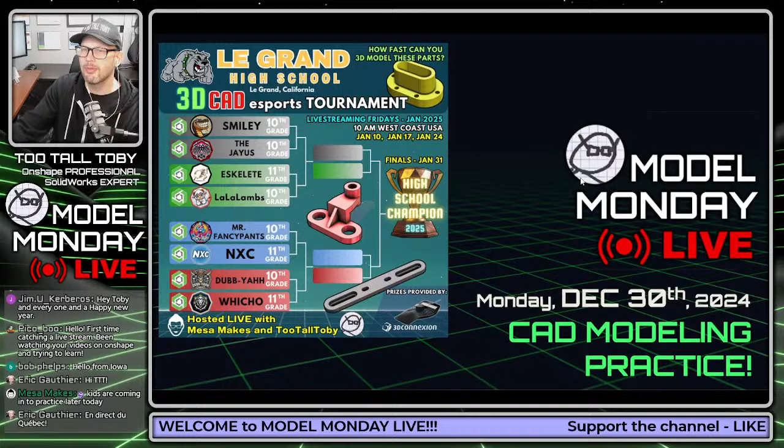Robbie says, I'm hoping to pass the Onshape Associate exam. Very nice. That would be awesome, Robbie. Good luck to you on that, and we'll have lots of tips and tricks to share with you today about Onshape to maybe help you through that challenge. But it's always good to set those goals, hold yourself accountable to those goals, and then ultimately achieve those goals.

You know, it's a lot of work to get through goals in the world of 3D CAD certification, and really just in life. But when we work really hard to achieve those goals, on the other side is where we're trying to get to. They say on the other side is greatness. So you sacrifice a little bit today, and then on the other side, you get to achieve greatness. And that's really what we should all be working towards. So huge shout out to Robbie on his journey, and good luck on that certification.

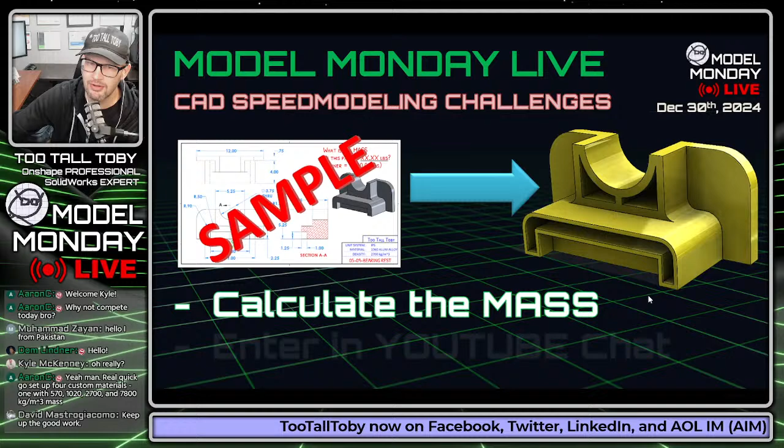Your first CAD speed modeling challenge is going to feature a 2D print. You're going to try and turn that into a 3D model as quickly as you can. You're going to try to calculate the mass, and you're going to enter your answer directly in the YouTube chat. The basic rules are you can use any 3D CAD package as long as you can input the density and output the mass. You are welcome to compete today. And make sure you use the specified precision, although I think all the models today are in full numbers. I don't think there's any... well, actually, you know what?

One of them is a decimal point answer. So make sure you use the specified precision. You can be more precise, but if you are less precise, then you might go out of spec.

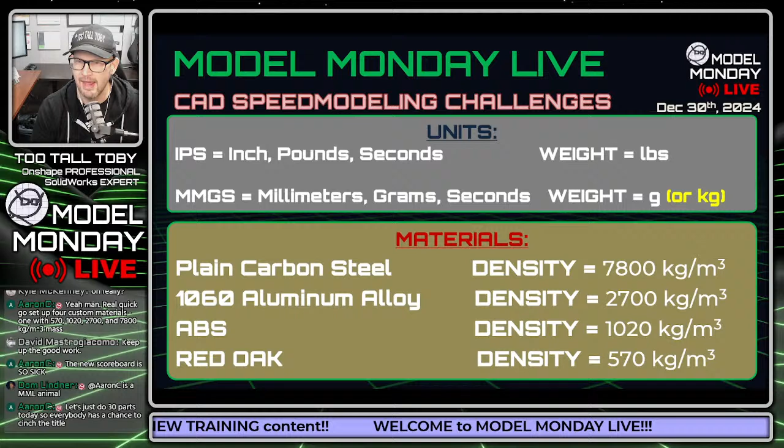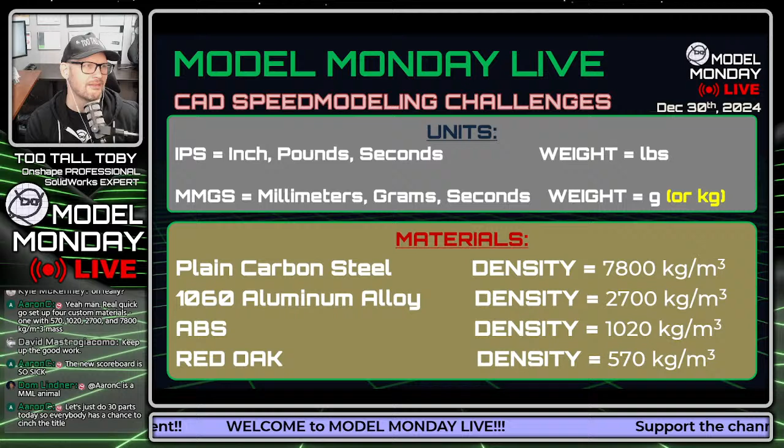Aaron C. says, let's just do 30 parts today so everyone has a chance to cinch the title. I like that. I like that. And Dom Lindner says, Aaron C. is a Model Monday Live animal. Yes. He is truly a super fan. Thank you so much, Aaron C. Much love to Aaron C.

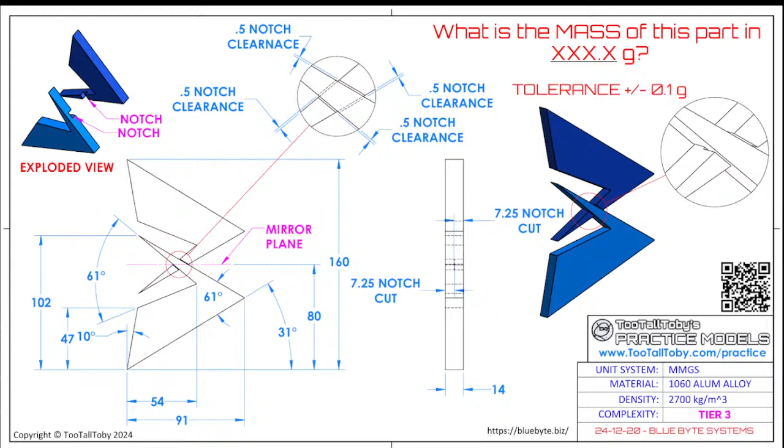I'm just going to look something up here real quick. Just probably going to play a little something in the background. I know, we're good. Sweet. Sweet, sweet, sweet. All right, guys. Hope that was enough time for you to grab the screen capture because we are moving on.

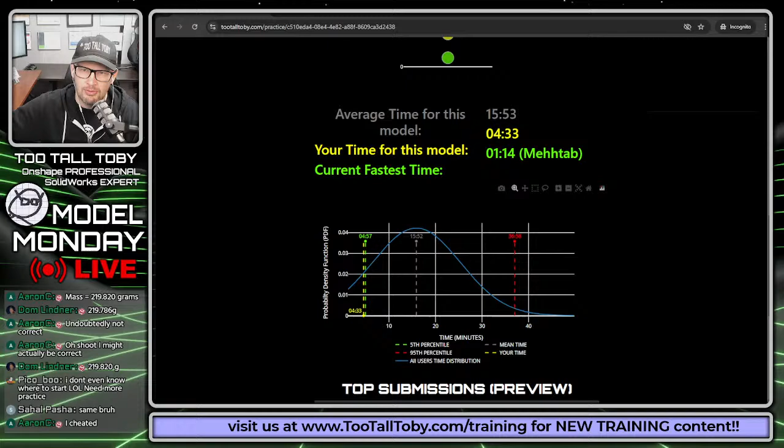They're a lot of fun. The cool thing about these challenges is that when you're done taking a 2D print and turning it into a 3D model, you get some pretty cool analytics. You get to find out how well you did on the challenge. So your time for the model was 4 minutes and 33 seconds. And then you can see what the fastest time was, 1 minute and 14 seconds. And you can also see what the average time was, so the average time from the field.

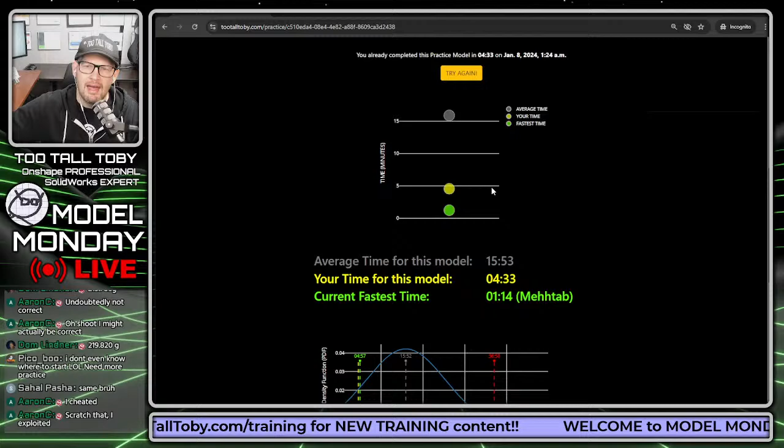You can see that there have been a total of 1,282 people who have completed this model. So that's kind of cool too. And then you can even click try again. If you're not happy with your time, if you want to go a little bit faster, you can click this try again button. You can try these challenges again.

But basically the way these challenges work is that you click here, you click reveal drawing, and boom, the drawing is up, and now your time is running, and you're challenged to figure out what the mass is. And once you figure it out, you can enter it into this field here. I'm going to enter in a mass of 999 grams and press enter, and it says incorrect. Your answer of 999 grams is not within the specified tolerance. The clock is still running.

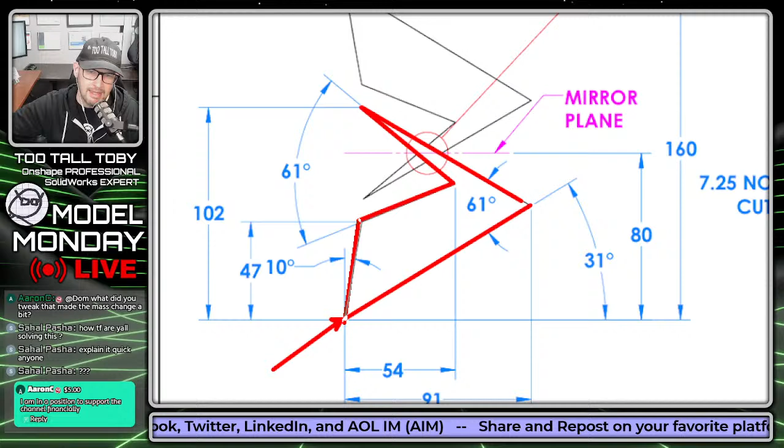So you probably would want to start a sketch on the front plane and then sketch this shape on the front plane. You have all the dimensions you need for this shape. And you can create that geometry on the front plane of your modeler using lines, and then you can go back in and you can use dimensions to lock in the locations of those lines, and that'll give you what we call a fully defined sketch. Then you can extrude that. I think the depth is 14. Yep, you could extrude that out to your depth of 14, and then you can use a mirror command and mirror that shape up top here, so you'll have the same shape at the top and at the bottom. And then after you got that, you can do some cut extrudes.

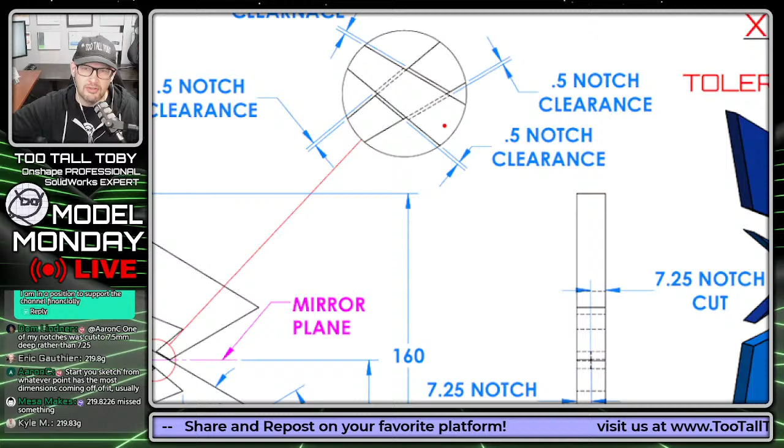You can cut extrude here with this 0.5mm clearance. So for example, you could start a sketch on this face, and then you could maybe create a shape like this that has parallel lines that are all 0.5mm parallel offset, this 0.5mm clearance. And then you could take that shape and you could cut that to a depth of 7.25. So that'll let you cut the notch in one of these. You see up here, it says notch.

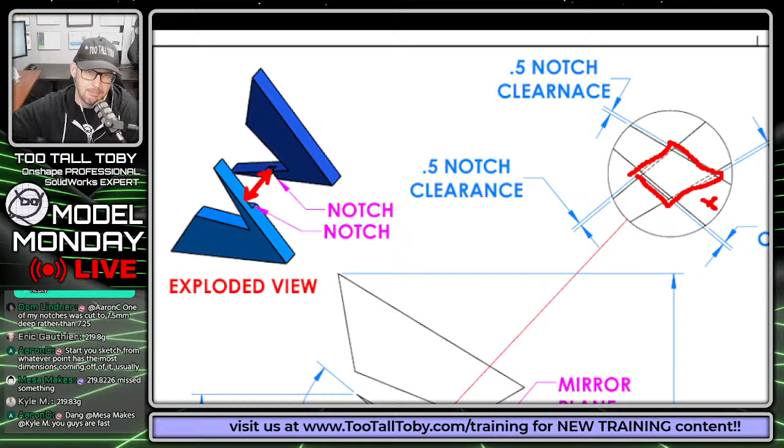And then you just repeat that process for the other one. And that should leave you with a gap here between these two. There's going to be a little tiny pocket here, a little tiny gap of 0.5 millimeters as well. Because it's 7.25. That's 14.5. And this is only 14 deep total.

So that'll give you 0.5 additional little gap there between them. And that should do it for that one. So I hope that's what you were asking for. I hope that explains it.

If it does, Sahal, let me know in the chat. Put a 1 in the chat. Let me know. And we have some other people in the chat also letting you know kind of what they think. Yep, no problem. No problem. Thank you for the question. Happy to help you through that one.

So we're going to talk more about this join option in just a minute. But beyond that, let's talk about what's going on with this high school tournament. So the high school tournament is going to take place on January 10th, January 17th, January 24th, and January 31st. There's only going to be 8 people in this tournament. Our world championship has 16 people in it. This tournament's going to have 8 people in it, and these are all high school students in 10th and 11th grade at Le Grand High School.

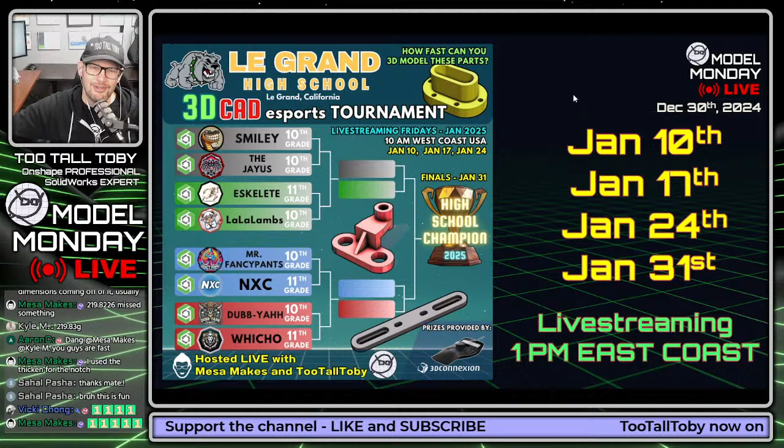So very excited to see these matchups. Very excited to see how these students do. I am super, super excited to see how these students do. And this is going to be a cool tournament. The tier level of the challenges is going to be a little bit lower to be appropriate for high school students. But I'm excited to see how they do. I'm excited to kind of experiment in this new format. And it's just a really exciting time here as we're moving into this format of working with high school teachers and working with high school students and doing some more tournaments like this. So hopefully this will be the first of many of these high school championships.

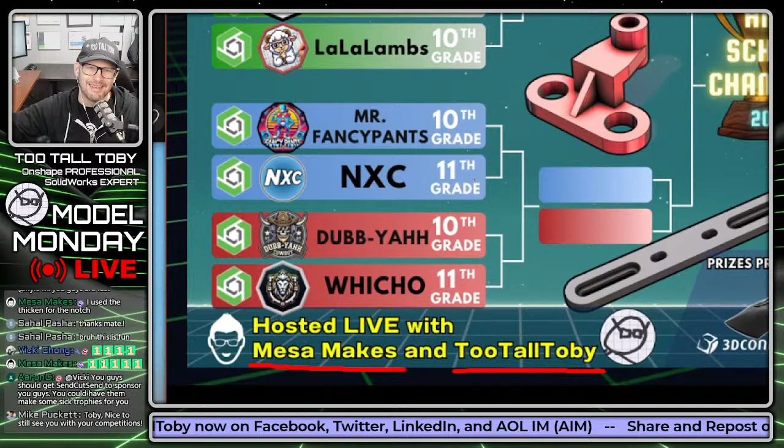And of course, huge shout out to Mesa Makes, who's in the chat, who's the instructor for these students. And I'm so excited to see how all these students do. Let's take a look at some of these names. We got Smiley, who's in 10th grade, going up against the Jayus, also in 10th grade. We got Eskelete in 11th grade, going up against La La Lambs in 10th grade. We got Mr. Fancy Pants in 10th grade, going up against NXC in 11th grade. And we got Dubb-Yahh going up against Whicho, 10th grade versus 11th grade. So this is going to be a really fun tournament to watch. I am super excited about this.

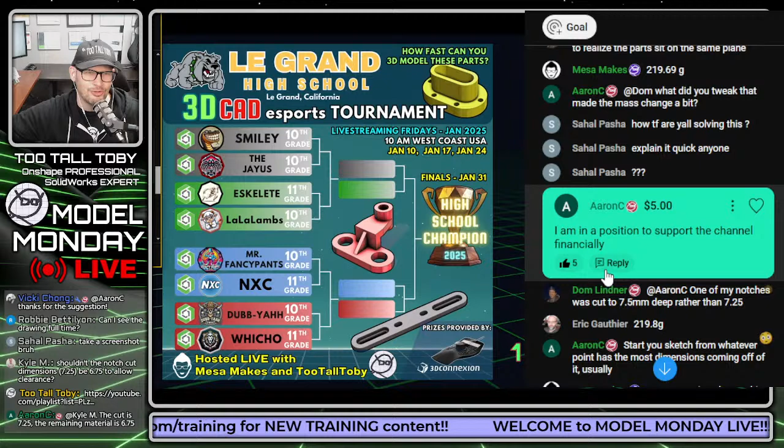And we see Mike Puckett in the chat, old friend of the channel, certification guru at SolidWorks. Mike says, Toby, nice to see you still with the competitions. Yes, indeed, Mike. They're only getting stronger, my friend. Great to see you in here.

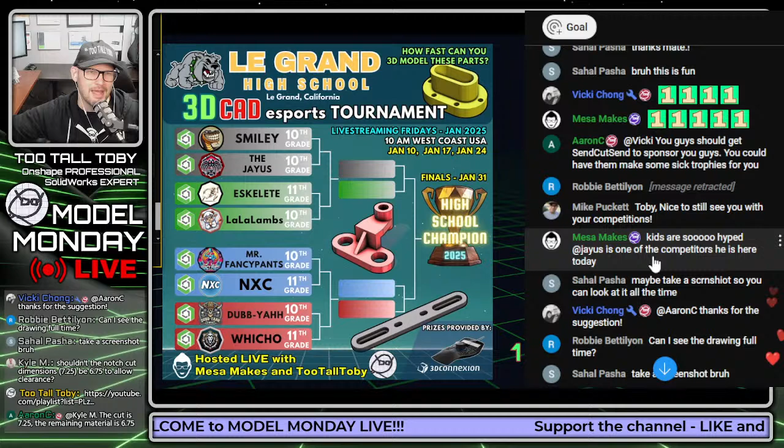All right. Question came in here from Kyle M. Shouldn't the notch cut dimensions 7.25 be 6.75 to allow clearance? That's a good thought. But if we only made those 6.75, we'd come up short, right? Because the cuts wouldn't go deep enough. If we only made them 6.75, then there would be 0.5 additional material here. And we want that to be 0.5 gap, not additional material. But great question. Definitely know where your head was on that one, Kyle. But yep, we want that to be 7.25, so we end up with a gap.

Can you draw the curved alignment post? Yes, definitely. I'll definitely draw that one up, Mehmet. That's on my list of things to do. So thank you for asking that. And we will definitely be seeing that coming out in the next couple of weeks on the channel, maybe even this week.

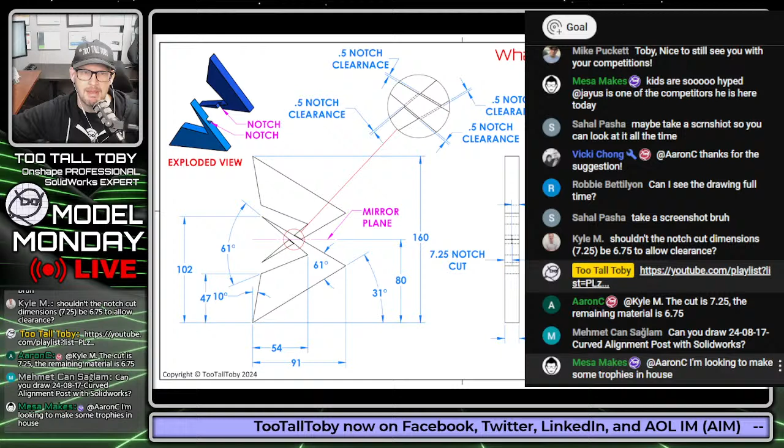Mesa Makes says, I'm going to be making some trophies in-house for this tournament. Yeah, that's what I like to see. I got to see one of those. That is awesome.

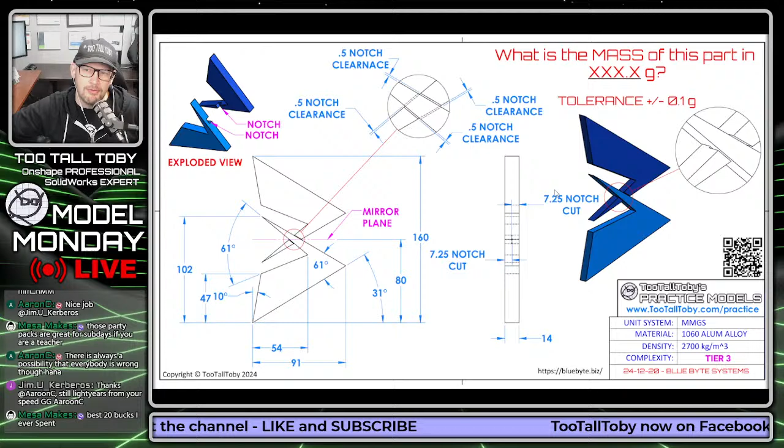And this first challenge here is called Blue BYTE Systems. And of course, this is part of our ongoing promotion. If you sign up at TooTallToby on YouTube and you use the join option to join the channel, there are 2 levels you can join at. And if you do the buy me a cup of coffee level, then we create a custom personalized practice model for you. So we want to say thank you so much to Blue BYTE Systems, who has joined that program.

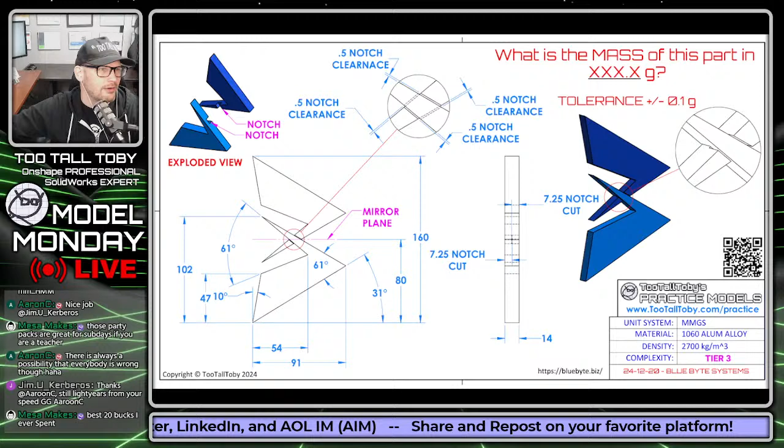So for this one, this is kind of a fun one. We're using the Blue BYTE Systems logo here, kind of turning it into a 3D model. Let's see what we got here for our answers in the chat. So Aaron C came in pretty darn fast with his answer, and his answer was 219.8. Dom Lindner, 219.8. Dom Lindner revising 219.8. We got Mesa Makes 219.7.

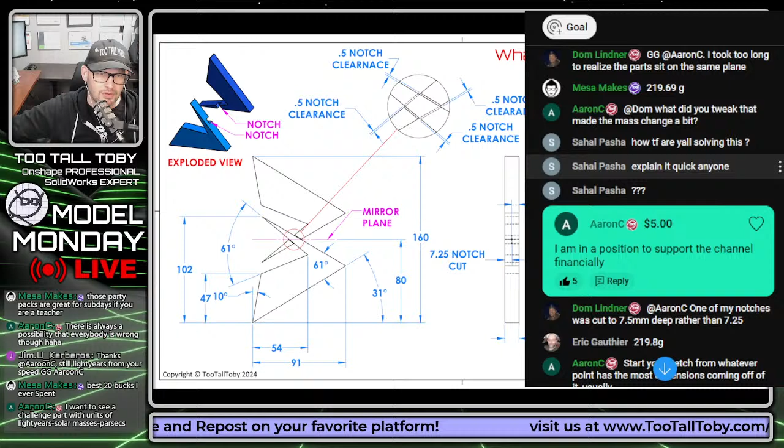We got Eric Gauthier 219.8. Mesa Makes 219.8. Kyle M in the chat 219.8. Very nice, very nice. I like this consistency in this answer. I think we know the right answer here. Let's see who else we got here in the chat. Who else came through with an answer?

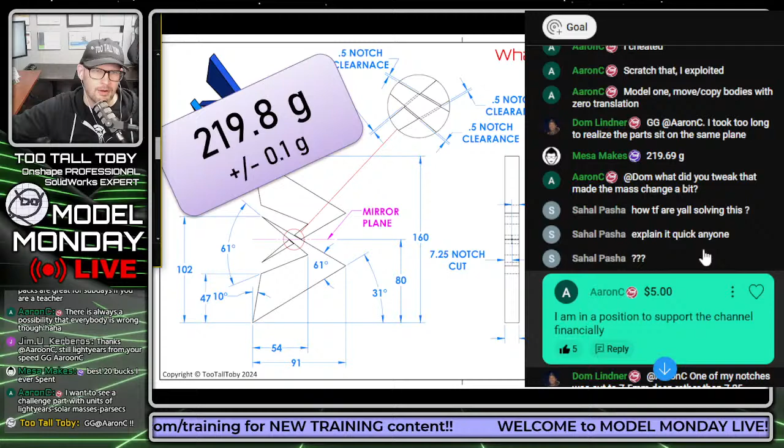Guys, the correct answer for this challenge is 219.8. So GG to Aaron C. Congratulations, Aaron. Well done, my friend. Getting yet another point on the leaderboard. Wow, wow, wow. Super fast, too. Congratulations to Aaron C. 219.8 is the correct answer. He got it right within the specification.

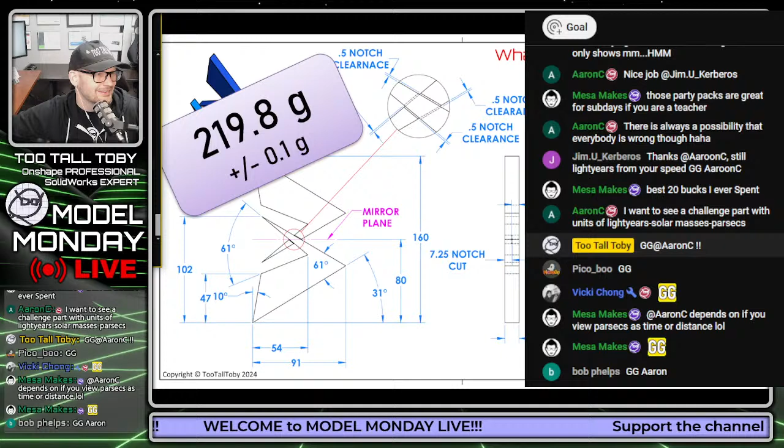But, guys, these challenges are never easy. Congratulations to anyone who was able to get that correct. These challenges are not easy, especially in this limited amount of time. It's a rush, man. It is an absolute rush. Congratulations to Aaron C. Well done. But the game is not yet over. We got one more challenge for you all today.

And for this one, we're going to go back in time a little bit to our 2023 tournament. This is a fun one, a really fun one. A little bit of order of operations on this one. Here we go. This next challenge begins in 3, 2, 1, go. What is the mass of this part in XXX grams? Tolerance is plus or minus 1 gram.

Grab a screen capture. There's one note on this print. Note 1: continuous surface. But it's an important note because it definitely will affect your order of operations. Unless you're really good with face fillet, then it probably doesn't matter. A little face fillet joke there for all the true hardcore CAD guys in the crowd today.

Here we go. What is the mass of this part in XXX grams? Tolerance is plus or minus 1 gram. Good luck to everyone on this challenge. If you were around back in 2023 when we had the World Championship, don't open your old file. Do it again. See if you can remember.

Not a super hard part. Not a super easy part, but I think a good part to end the year of 2024 on. It's a fun little challenge for everybody. Good luck. And Aaron C in the chat says, that part was hard, man. Anyone who finished it deserves a pat on the back. Nice, Aaron C. Very nice. I agree.

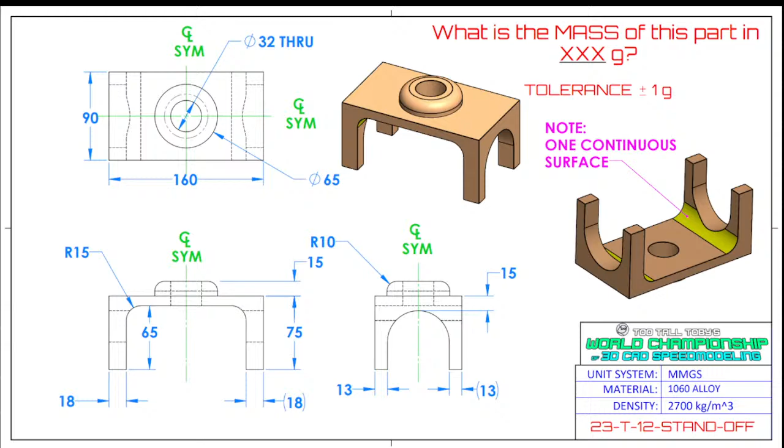All right, guys. Let's move on. We're going to do a live solve using Onshape here.

A lot of times people in Discord will send me their model. They'll send me like a step of their model because they modeled it in Fusion, and they'll say, what am I missing here? And then I get to open that up in my CAD programs and do a geometry compare and then kind of help them figure out where they go.

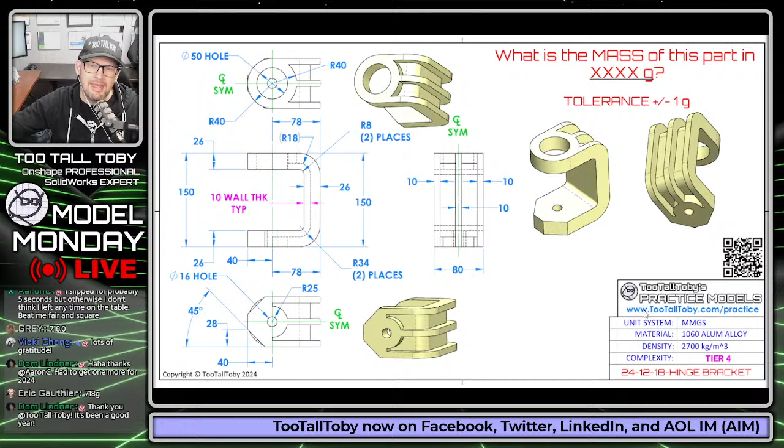And so what I'm going to do is I'm going to start out with a game plan. Before you create any 3D model, you want to start out with a game plan. And in the case of this 3D model, or really any 3D model, the game plan should start out with you asking, where should the origin be located? Now, the first thing you want to look for is, does the model have symmetry? And that's going to be apparent by these CL SYM notes. So there's a line of symmetry going right down through the model in this direction. So I think the origin is going to be right at the center of the model.

The next thing you want to ask is, is there a location where there are a lot of dimensions coming from? And I think in the case of this model, there is a location, and that location is right here. So the 78's coming from there, the 40, the 150, all these different dimensions all seem to be coming kind of from that spot. So I think that's a good spot. You could also make the argument to put the origin up here. That would be fine too. I think it's kind of negligible, the difference between those two. So the first thing you want to think of is, where should my origin be located?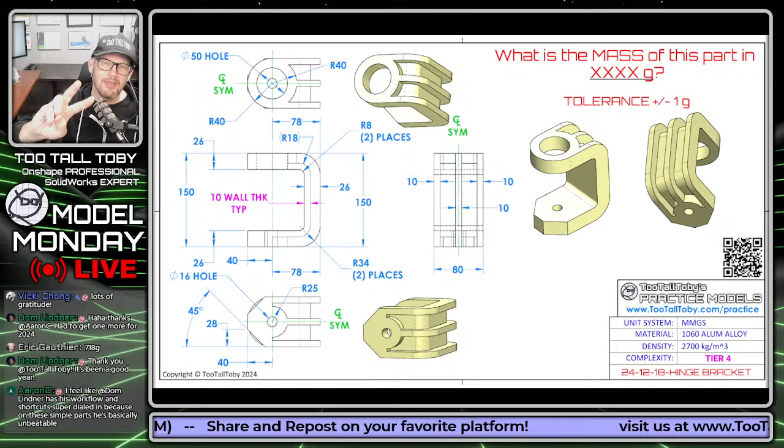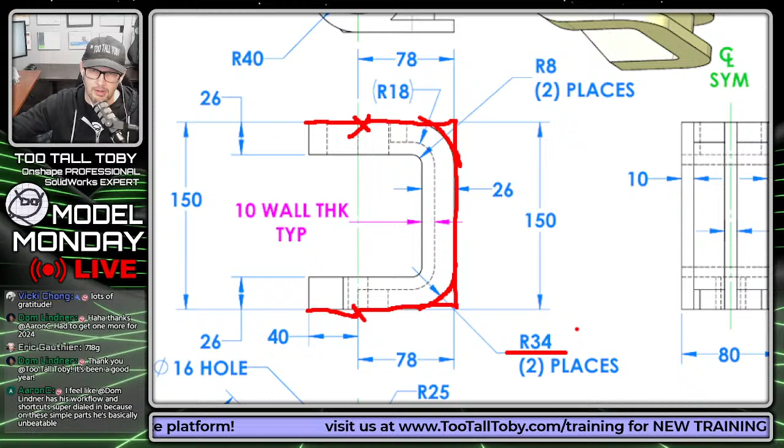The second thing you want to think of is, what's my very first sketch going to look like? And in the case of this model, I think my first sketch could actually look like a 40 millimeter line that comes to the origin, then a 78 millimeter line, a 150 line, another 78 line, another 40 millimeter line. And then I could round these off with a radius. Now, the reason I'm confident that I can do this is because this radius has a value of 34. The wall thickness is 26, and this radius has a value of 8. And some quick math tells me that 34 minus 26 equals 8. So I can just offset that information in by doing what's called a thin feature extrude.

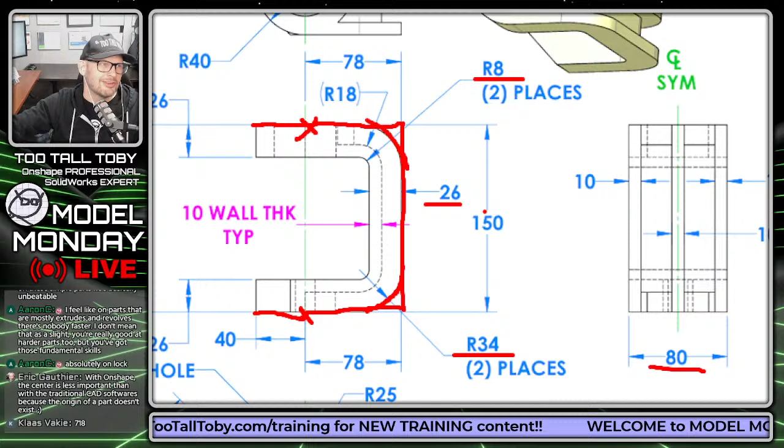So my first sketch is going to look like this outer perimeter of the part here. And then my first extrusion is going to be a midplane or a symmetric extrusion that's going to go out to 80 millimeters. And it's going to use the thin feature option. And for the thin feature option, I'm going to input a wall thickness of 26 millimeters. Then I think what I'm going to do is I'm going to start kind of rounding off the main shape of this part.

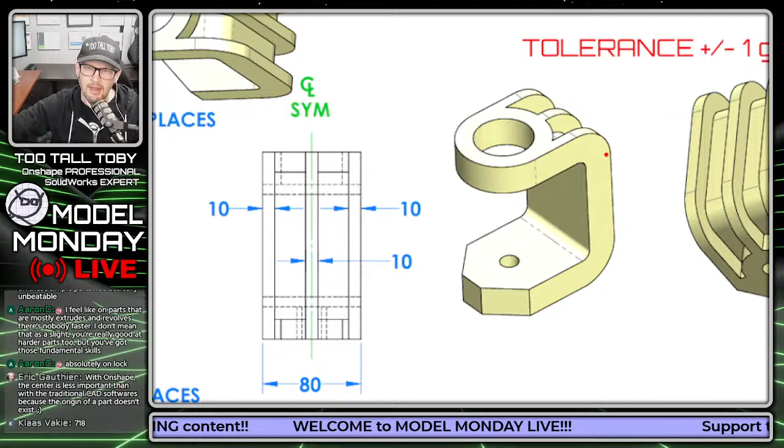So the first thing you do is you figure out what your first sketch is going to look like. Then you figure out what your first feature is going to look like. And then you're able to go on and start thinking about what the remaining features in the model are going to look like. So I think for my next feature, I'm going to round off this shape here. Then my next feature, maybe I'll add a chamfer to chamfer off this shape here.

Then maybe I'll start getting in and filling in some of the insides a little bit. So I'll kind of fill in this shape here so that top is all solid. I'll fill in this shape here so that bottom is all solid. And then I think I'll tackle this kind of centered rib going up through the middle. And then for my final features, I'll add this hole and I'll add this hole here. So it's good to come up with a game plan before you start creating your model.

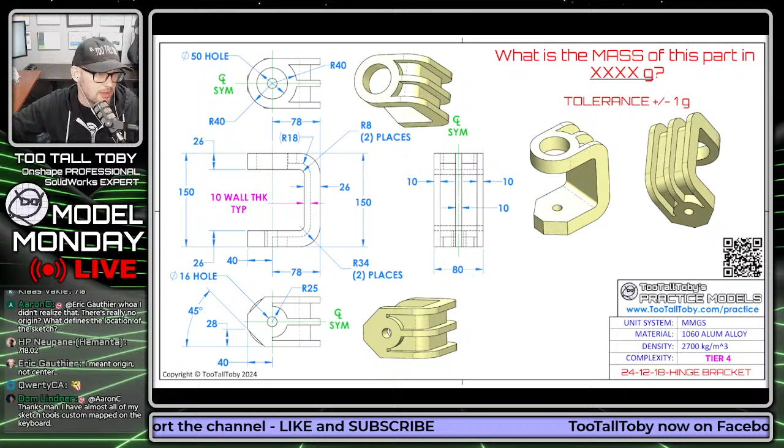But once you've got that game plan, it's going to be time to jump in and start working in the software. So I'm going to use the Windows snipping tool and just grab a screen capture of this print. I'm going to take this print and move it over to my second screen over here so I can get all those dimensions. I'm going to jump into Onshape. Here we go, Onshape. And I'm going to choose in Onshape to create this document.

Let's see here. Let's bring up our keyboard here so you guys can see all the shortcuts that I'm doing as I'm going through this challenge. So here we go. We're in Onshape, and let's choose to create a new document. I'm going to call this 24-12-18-hinge bracket, and I am going to store this in the public space. So I'm going to create this as a public document.

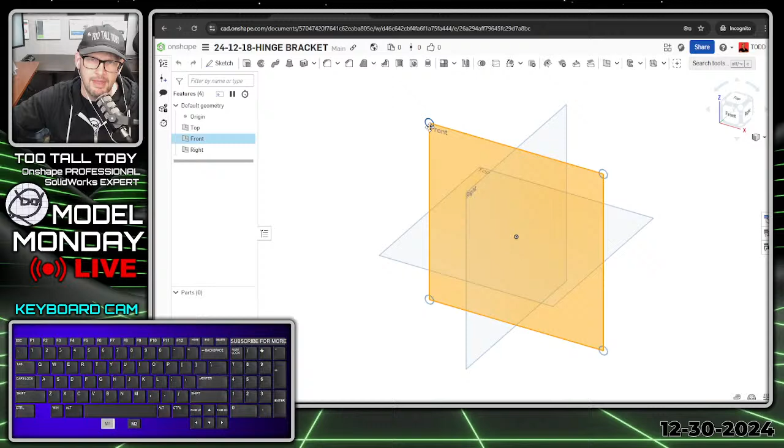So if you're ever looking in Onshape, you can search here in the public document for this text, 24-12-18, and then you'll be able to bring up my exact model. So I'm going to choose to create this in the public space, and now we're going to get into it here in our first sketch. So we're going to just follow through the game plan. Front plane, begin a sketch. So S key, begin a sketch. N key, get normal to.

S key, I'm going to create a line here. I'm going to create a line that starts here at the origin, comes over. I'm going to create this using auto dimension 78, enter. I'm going to come up here, single click, auto dimension 150, enter. I'm going to bring this over in this direction. I'll just make it vertical here. So I'll just kind of wake up that point and make that vertical.

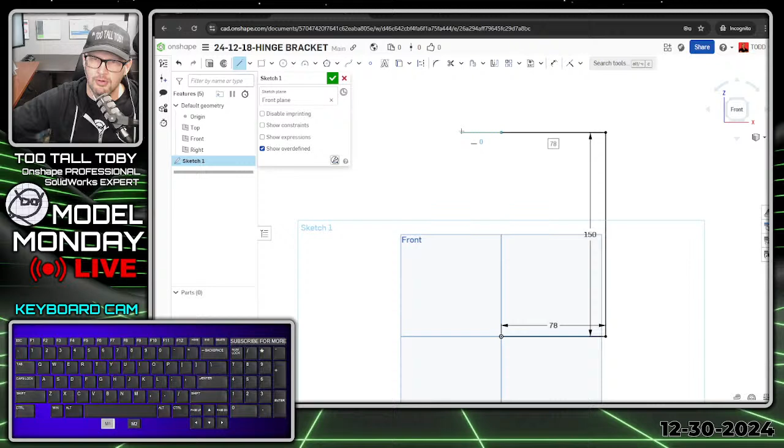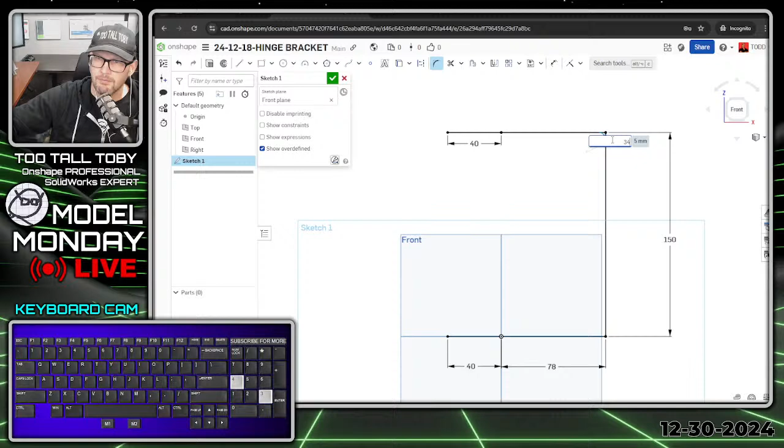Move my mouse over in this direction, and that's going to be at a distance of 40. Enter, and then I'm going to just make one more line down here, again, at a distance of 40, enter. Let's click on this point and make sure it's vertical. It is. The whole sketch looks black, so it looks like we are in the right direction here. Let's make sure that our corners are rounded off, so we choose the fillet command, and this fillet is going to be applied on this corner here, and it is going to have a dimension of 34. Enter, and then I'll also click here on this corner, and I'll just press enter again so that it also gets a radius of 34.

So if you're following along as a tutorial, that's what your first sketch should look like. It looks like it's fully defined. Everything is black. And so now I'm going to jump into the extrude command in Onshape. So here on the toolbar, or you could press the S key. Now I've customized my S key, so the extrude command is just right there waiting for me. So S key, extrude. And then instead of doing this as a solid extrusion, I'm going to do this as a thin feature extrusion.

And then what am I going to be extruding? This is kind of cool. In Onshape, you could right mouse button on this entity and then fly out the menu for select and choose tangent connected edges.

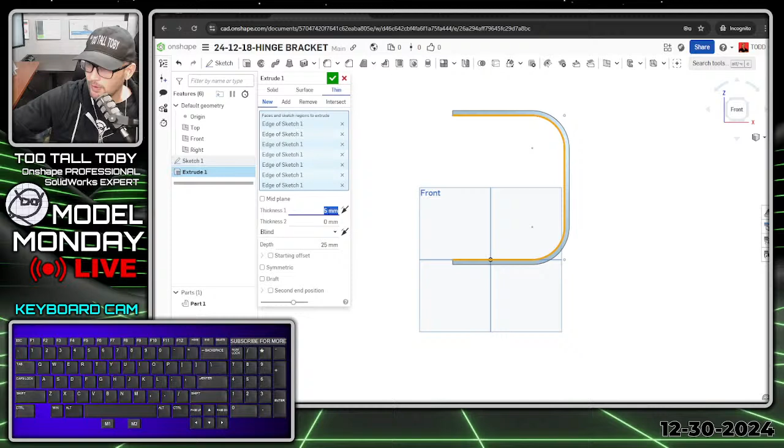So that goes through and grabs everything. And then the thickness here is going to be 26 millimeters, and I'll choose to reverse the direction on that, so it's going to the inside. And then the depth of this is going to be 80 millimeters.

And then if I roll the view a little bit here, you can see I can choose symmetric. And that symmetric is going to make that kind of like a mid plane. It's going to start at the middle and then go out to that 80 millimeters. So I'm going to hit the green check mark, and there we go. There is our first feature.

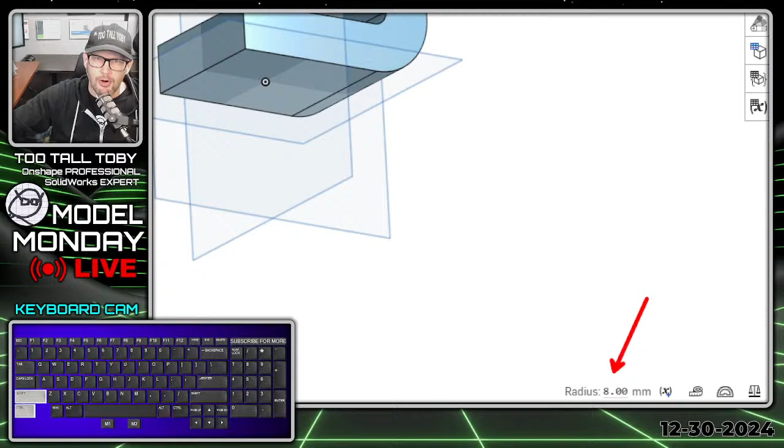And then if I click on this face here, and then I look down here in the status area in the lower right, I can confirm that that has a radius of 8 millimeters. You can just click on a face and then look down here. I didn't have to click measure or anything like that. I just click on this face and then look down here in the corner, 8 millimeters. So that's good. So that confirms my earlier math. So we are ready to move on to the next feature.

So the next feature I create is going to be a fillet. And for this fillet, I'm going to use this option here, full round. And so with full round fillet, I can just remove this face here and replace it with a round that touches off tangent to that face. So the first face side will be this side, move around here. Second face side will be this side, and then the faces to round will be this side. And that all looks good to me. I'll right mouse button in the background and say confirm fillet 1. Oh yeah, this thing's really coming together.

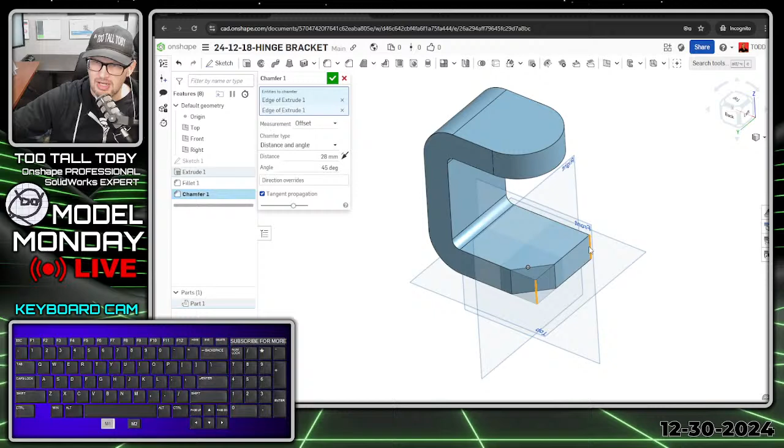And so now I'm going to press the S key and jump into the chamfer command. We could use S key for fillet, S key for chamfer command. And this chamfer is going to have a chamfer distance of 28, and it's going to be 28 by 45 degrees. That's what's shown on the drawing there. So distance and angle, or it could be 28 by 28 if it was symmetric. So I'm going to pick on this edge here and this edge here and chamfer those regions off. So we hit the green check mark, and there we go.

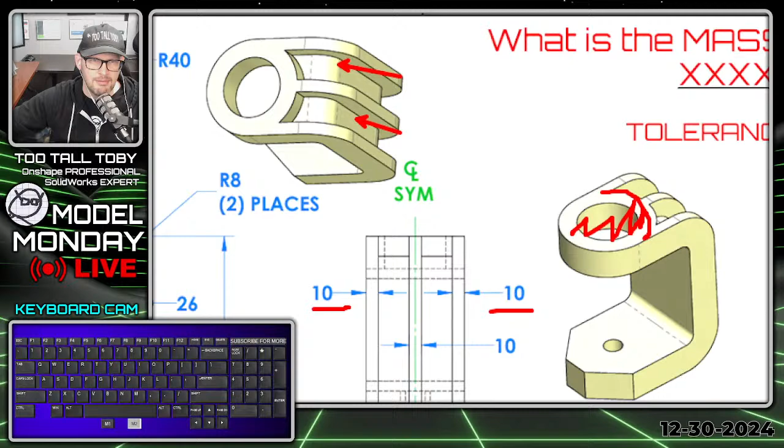Now, one thing I forgot to mention in my game plan was that, in my game plan, I said I'm going to create that shape, and then I'm going to come in here and kind of fill in this region here. I forgot to mention one thing, which is we need to hollow out this region here. Well, since all of the walls are called out as 10 millimeter walls, everything's called out here as 10 millimeters. Here's 10 millimeter typical wall thickness. Maybe we could just do this with a shell.

So let's put this back on our second screen. Let's go back into Onshape here and choose the shell command. And then for my shell wall thickness, I'm going to make this 10. And let's start picking faces. I love the way Onshape right away shows us a preview of what this is going to look like. I think that looks pretty good. I think that looks like what we're going for there. So yeah, that's a winner. So I'm going to hit the green check mark, and look at that. We were able to shell out that geometry, and that's all looking pretty good to me.

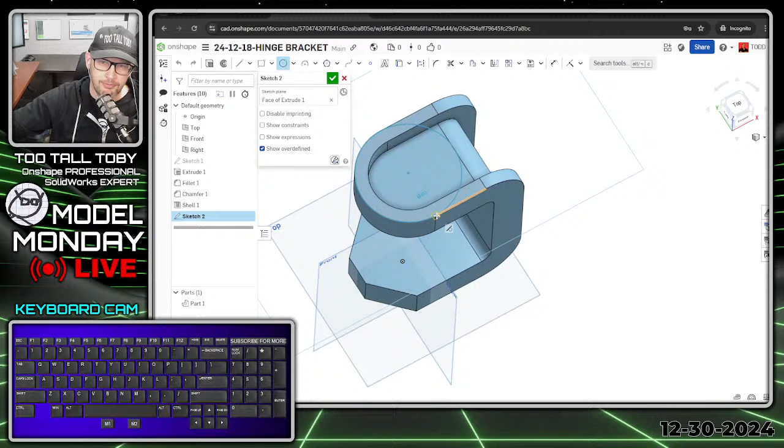So now I'm going to choose this face here. I'm going to begin a sketch. So S key sketch. I'm going to press the S key again and begin the circle command. I'm going to single click here at the center of this existing edge. And then I'm just going to move my mouse over, and I'm going to pick up on this point here. The circle is called out with a radius of 40. That's also what the radius is on the front of the model. So this should just be a co-radial or an 80 diameter circle there. So that looks pretty good. That's all I have to do with that sketch. I don't have to add any dimensions or anything.

And then S key extrude. And this extrude is not going to be thin, it's going to be a solid extrusion. So I'll come over here to solid, I'll choose inside of that circle, and I'm going to say that's going to go up to, see here, up to part, and I'll just pick the part here, and boom, there we go.

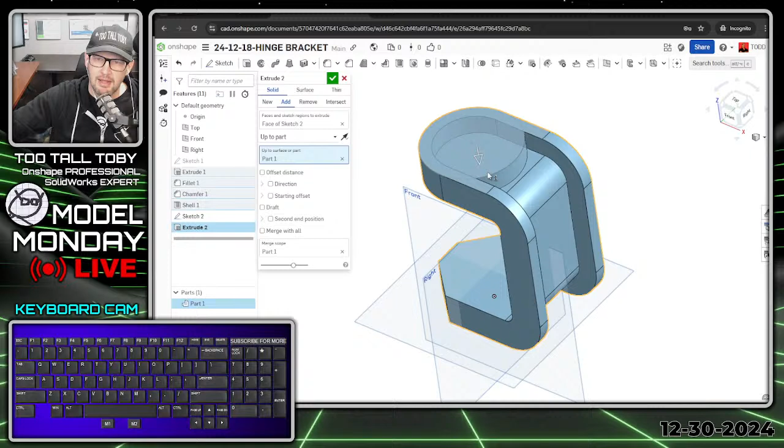We got that nice and filled in. And now I'm basically going to just repeat that on the bottom side. So I'll roll this around here to the bottom side. I'm going to pick this face here, S key, begin a sketch. Going to press the S key again. I'm going to start the circle command, create a circle here.

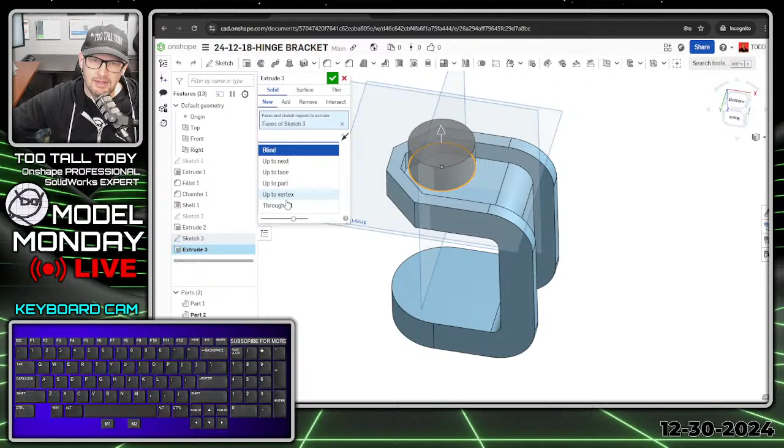This time the circle is going to have a radius of 25, so diameter of 50 if I'm using the auto dimensioning. S key extrude, and then once again, this is going to go up to part. And so I'll pick this face here, and yeah, that looks like exactly what we want. So I'll hit the check mark here.

Now, to fill in this remaining region here, I could come in here and I could create a sketch that comes over, down here, down to this edge, down to here, here, here, here, and then close it off, and then create another arc here to close that off, and then I could fill in that region. Or I could just make a sketch of one line.

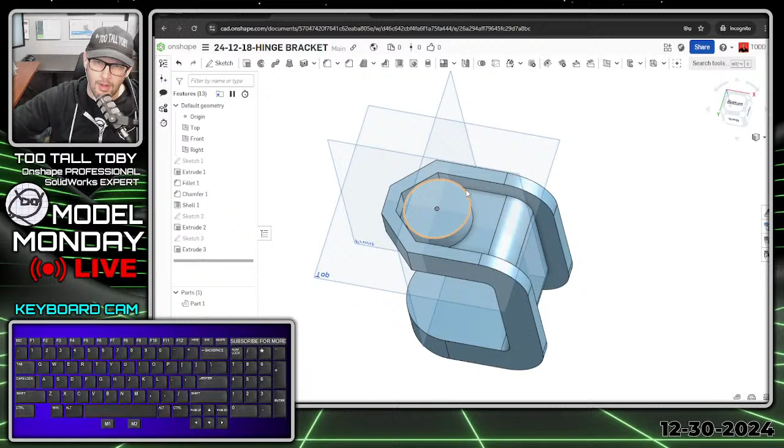And what that might look like is if I pick this face down here, S key, begin a sketch, and I'm going to press N to get normal to, and then S key to begin a line command. I could just create a line that starts out up here, coincident to that edge and vertical through the origin, and then ends up down here coincident to this edge and vertical. You notice how that line is nice and fully constrained.

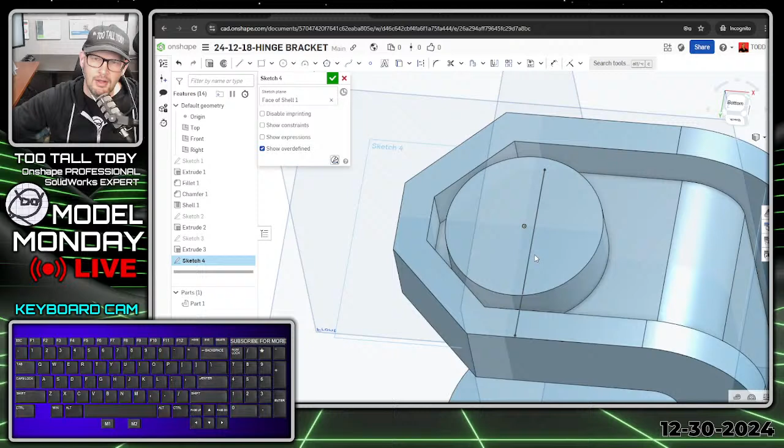Well, the cool thing about Onshape is if I choose to extrude that, so if I go S key extrude, I'm not going to use what's in here right now. I'm going to press the space bar to clear that. You could click this X or just press the space bar. And then I can just pick right here. And Onshape automatically breaks out that region between the sketch and the existing edges. So I don't have to sketch any of that extra stuff.

I can just pick that region there, and then I could choose to bring that up to face and pick this face right here. And yes, that looks great. That's perfect. I love it. So that definitely works. And then for our final tricky feature, the kind of rib-looking feature, I'm just going to go back and use that original sketch. Remember we created this original sketch here?

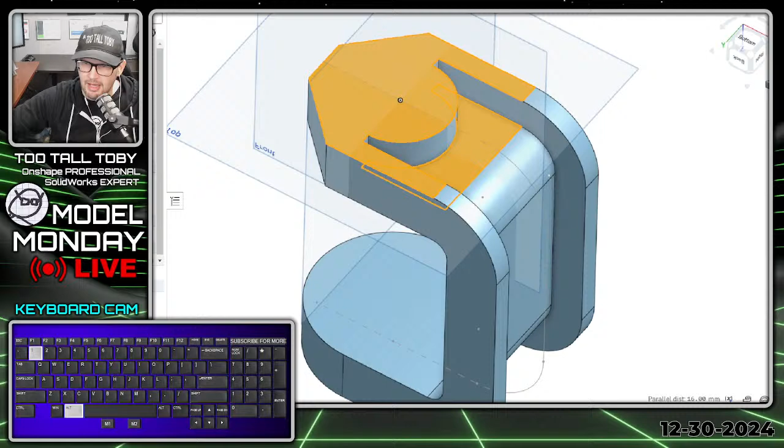So if I pick this face here and this face here, I can look down in the status area and see the distance between those faces is 16 millimeters. And that checks out. 26 minus 10 is 16 millimeters. So now I can take this original sketch here, and I can either click it or not click it ahead of time. I'm going to not click it ahead of time. I can press the S key, extrude, and then say I want to make another thin feature.

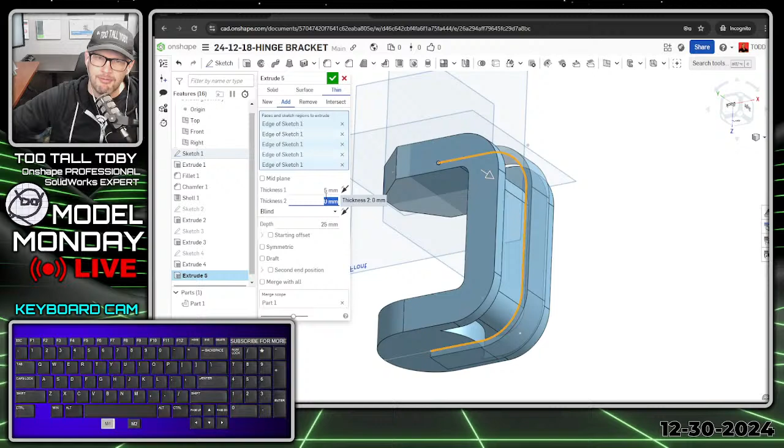And now I can start picking these edges of that original sketch. Go around and pick these edges. And now, instead of saying that I want the thickness to be 5, I'm going to make the thickness 16. Enter. Look at that. Look how thick that is. And then I'm going to say I want that to reverse direction so it goes down into the part.

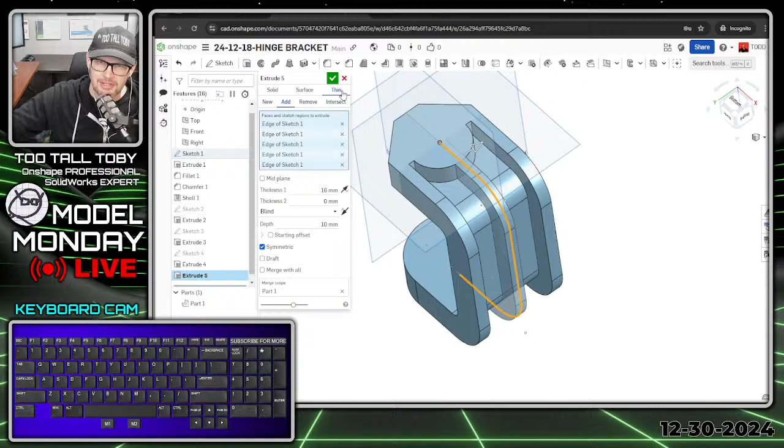And then instead of saying I want the depth to be 25, I'm going to say I want that to be 10 to match the wall thickness of that rib. And just like we did earlier, I'm going to say I want that to be symmetric. So I think this is a cool model, not only because I like the geometry, but also because it gives you a chance to work on your game when it comes to Onshape and the thin feature. And there's some pretty cool time-saving tricks you can use if you start getting used to that.

It's a relatively new feature, the thin feature. I think it came out earlier this year, maybe last year, but definitely a really useful feature that I think deserves a little bit of practice, because then you could work it into your overall arsenal in Onshape. So I'm going to hit the green check mark.

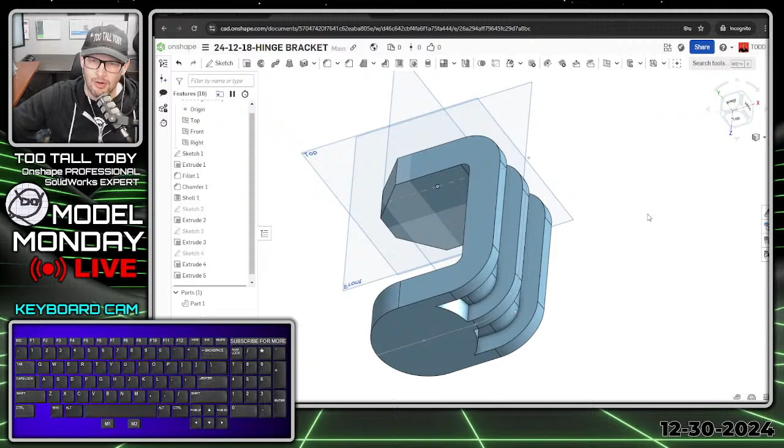There we go. That finishes that feature. And now this thing's just a walk in the park. All we've got to do is just pick this face, S key, begin a sketch, S key, circle, pick this point here, move our mouse, click, let go of our mouse, type in the diameter of that circle, 16, enter, S key, extrude. Again, it's going to switch over to solid, so you're going to have to pick that arc or inside that region again.

We could probably also use up to next, or there may be some other dynamic end conditions there, but that works for me. I'm going to press the P key on my keyboard to hide my planes. You can see I've still got some sketches and the origin shown, so I'm going to press Shift P to hide all my reference geometry.

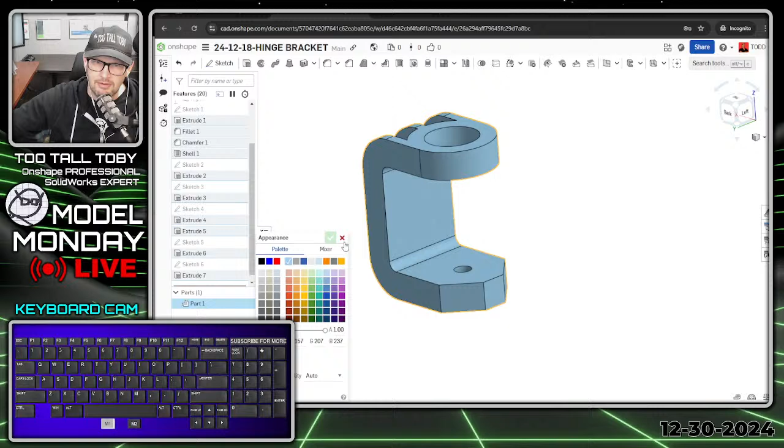I'm going to come down here to the name of the part, right mouse button, and I'm going to say assign or edit appearance. And I'm going to just change the appearance here to match kind of what the customer gave me. The customers always like it when you match their color, or at least get close to the colors of their parts. Make that a little bit closer. There we go. That looks pretty good.

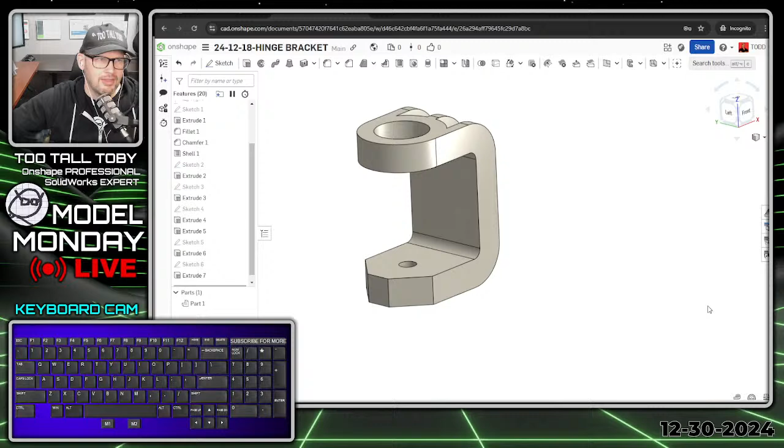And then I'm going to right mouse button down here where it says part 1, and I'm going to say assign material. And the material for this part is called out as 1060 aluminum. So TTT custom materials, aluminum 1060, hit the green check mark. And then finally, we'll go down here in the corner and click on this button for mass properties. We'll click on this part, and we're coming up with an answer of 1083 grams. I'll type that into the chat, and let's see if we got it correct.

So we're going to go back here to our presentation, and the correct answer for this model is 1083 grams. So yes, we did it. We got it correct. Good job, Toby.

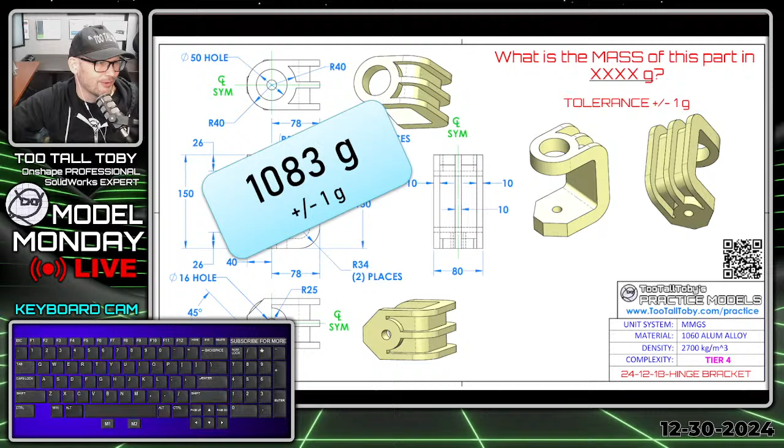That's a pretty fun part, that hinge bracket part. And like I said, I think it shows you a lot of cool stuff you can do with Onshape and with the thin feature tool. Sometimes we overlook that thin feature tool, but it's got some pretty powerful functionality. It's just about doing the reps, right? Just about doing the reps and learning how to use it.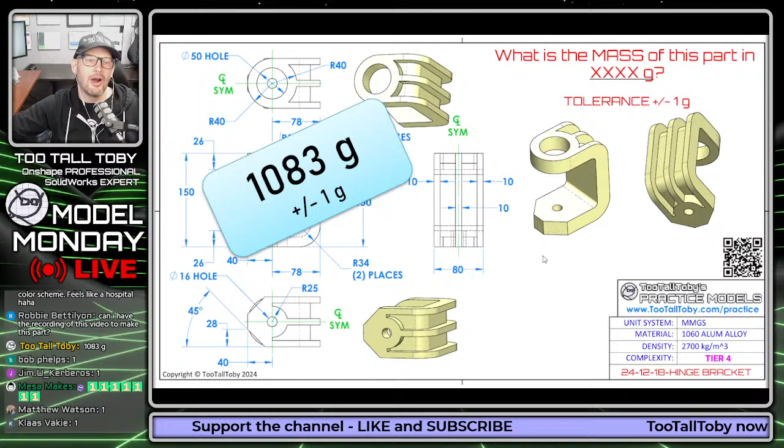All right, guys, and that brings us to our final challenge for you, the answer to our second challenge here.

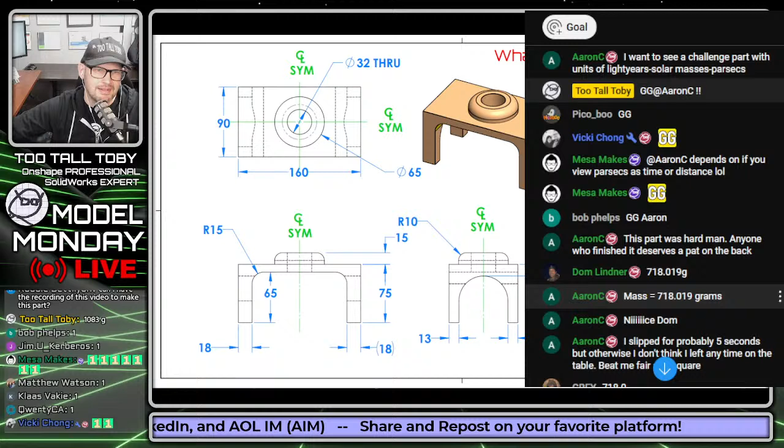First person to answer this one, Dom Lindner, 718 grams. Aaron C, 718 grams. Nice job. Gray, what's up, Gray? Long time no see. 718 grams. Eric Gauthier, 718 grams. Very nice, very nice. Klaas in the chat, 718 grams. Very nice. This is a fun model, guys. I really enjoy this model.

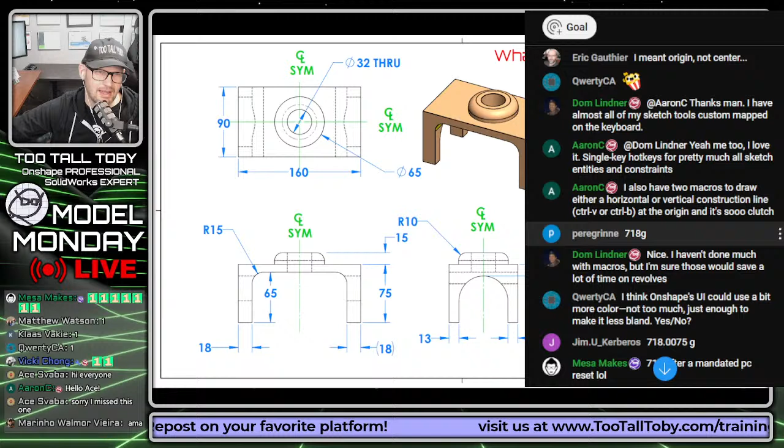HP Himanta in the chat. Welcome back, my friend. Former tournament runner, 718 grams. Very nice. Peregrinne in the chat, 718 grams. Nice. Jim U, 718 grams. Mesa Makes, 718 grams. Chuck in the chat, 718 grams. Very nice, very nice. And anybody else coming in at the last moment here? Let's find out. Ace is in the chat, says hi, everyone. What's up, Ace? Welcome, welcome.

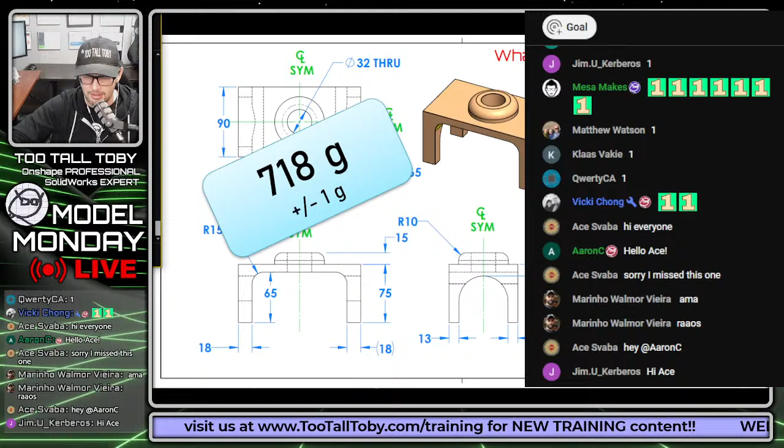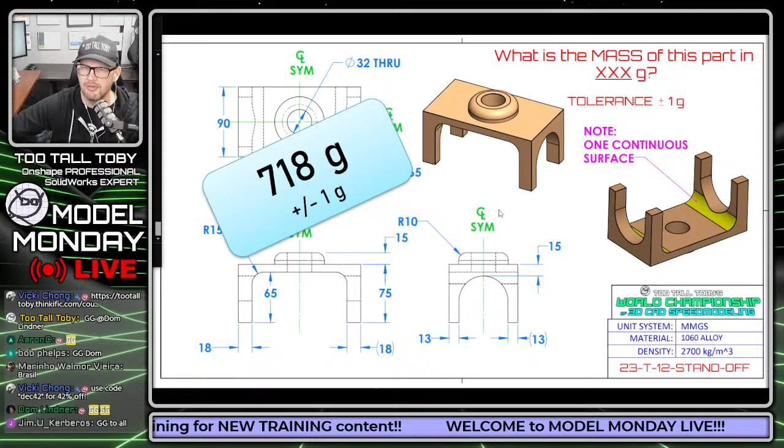Guys, the correct answer is 718 grams. So GG to Dom. Well done, my friend. Congratulations. And that's going to get a point for Dom in this, the final challenge on our Model Monday live stream for 2024. What a great year it's been, guys. Congratulations to anyone who finished these challenges. These are not easy challenges. Well done. Pico_boo is still working on it. I'm slow. Don't worry. The speed will come with time and practice. It's all good.

But congratulations to Aaron C. and Dom. And I guess I'll just make it official. Congratulations to Aaron C. for locking down the Model Monday Live leaderboard for 2024. I know we haven't updated it dynamically yet, but I'm pretty sure that no one's going to be able to catch up to you since there's no more challenges. So good job, my friend. Congratulations. Sick win, sick year. Well done. Wow, wow, wow.

Oh, the last part was sudden death, so Dom actually won. Wow, good job, Dom. You won. You got the last one. Final point wins it all. Congratulations, according to Aaron C.